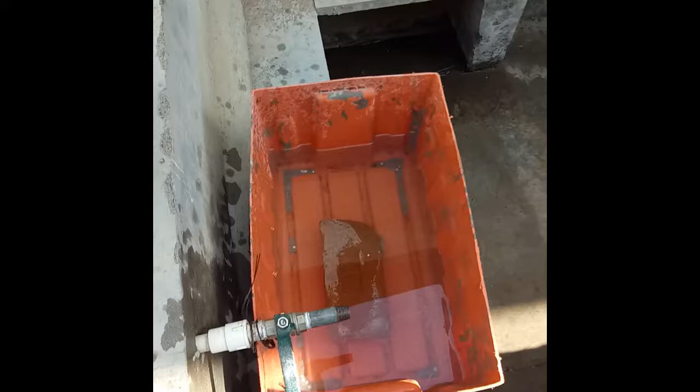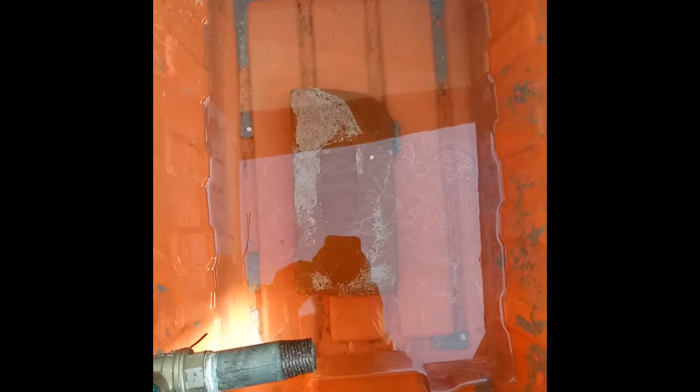So students, today we'll perform the compressive test on the brick. You should take three samples. One sample you can see here. The procedure is that first we need to put this brick under water for 24 hours, and then we have to remove it. So we'll remove it after 24 hours, allow it to surface dry, and then we have to perform the test.

Next, you have to fill this frog with mortar, and then perform the test. So you can see the sample, right? We'll take this brick out after 24 hours and then perform the test. So after 24 hours we have taken out the brick, and we'll perform the test on this brick now. But first we have to allow it to surface dry, and then we'll perform the test.

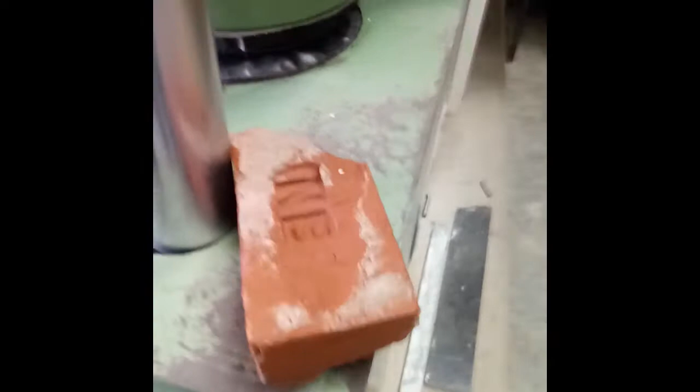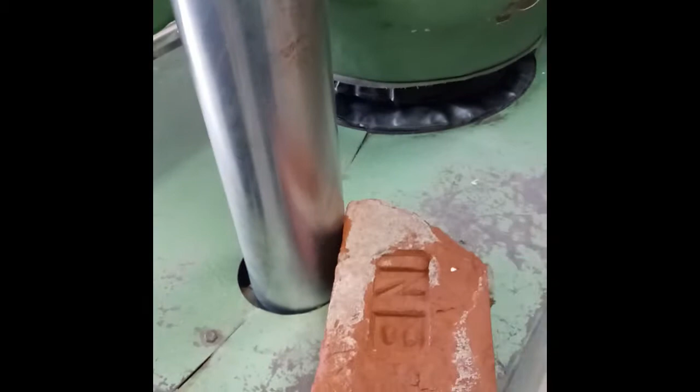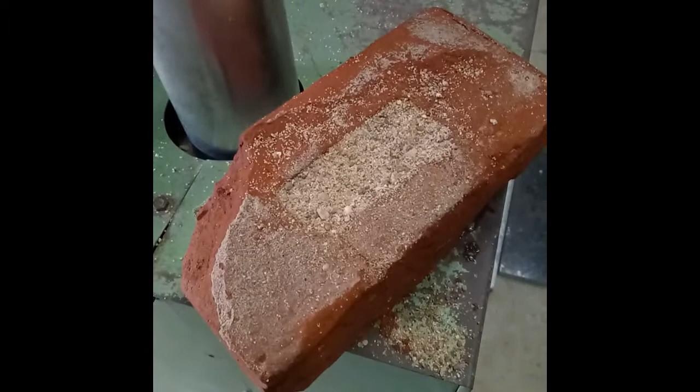We'll consider only this unbroken portion, and we have to measure the actual dimension and count the total area, and apply a rate of load of 14 Newton per mm square per minute. So this is the sample. We should fill this frog with mortar, but we have filled it with sand, so that's okay. We'll put load on the whole brick, but measure only this dimension. Since the other part is broken, we'll measure just the unbroken part, and the load should be equal to 14 Newton per mm square of this size, right?

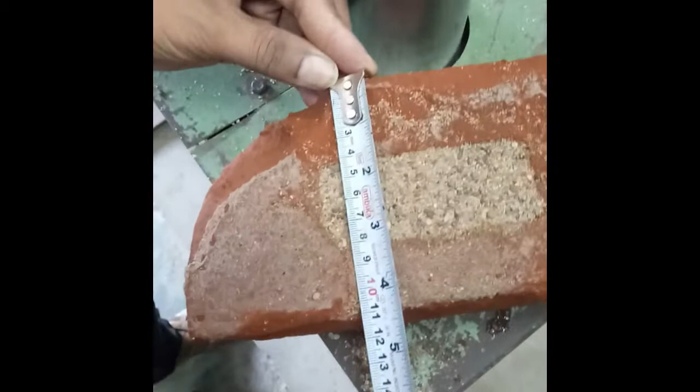So we'll measure the dimension. You can see that the dimension is 11 centimeter, or 110 mm. Now we'll measure like this, since we are considering this portion only. It is 9.5 centimeter, or 95 mm. So it is 95 by 110, and that area we'll consider for the test. The remaining portion we are not counting. We should have a whole brick, but since we got a damaged piece, we will perform the test on this one.

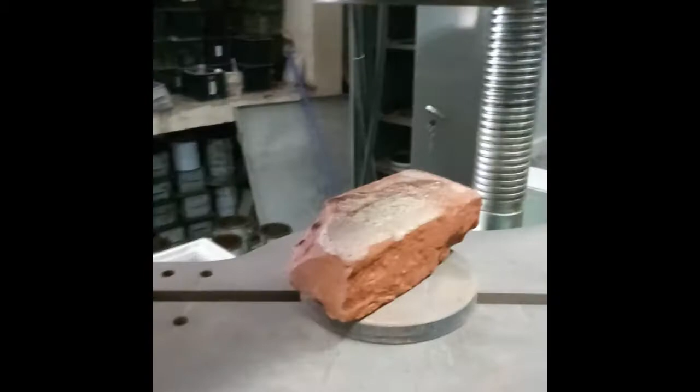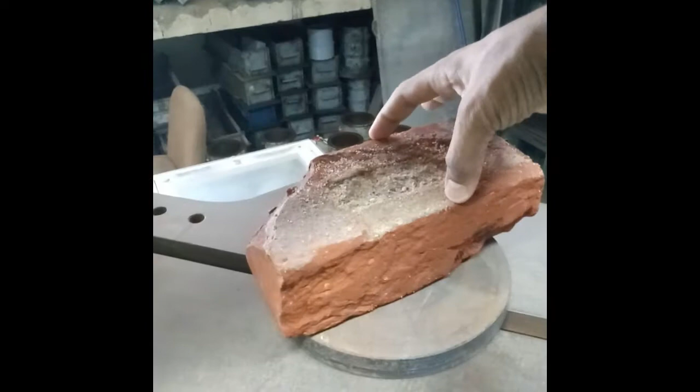We have put the sample inside the UTM. I don't need to tell you more about the UTM, you already know. This is the lower jaw where we apply the compressive force. The rate is 14 Newton per mm square per minute. We have this length of 95, and this is 110. So the total area will be 95 multiplied by 110, multiplied by 14 Newton. That much load we have to apply per minute.

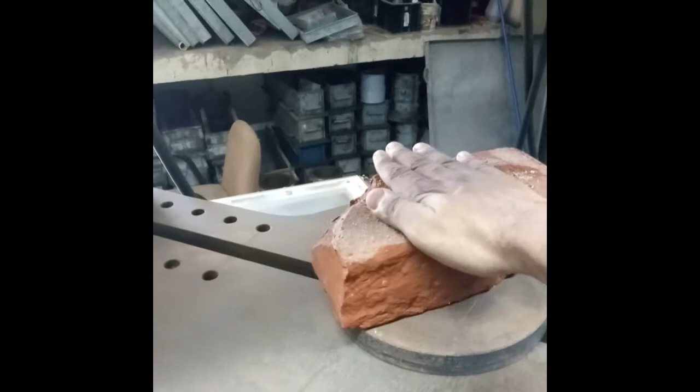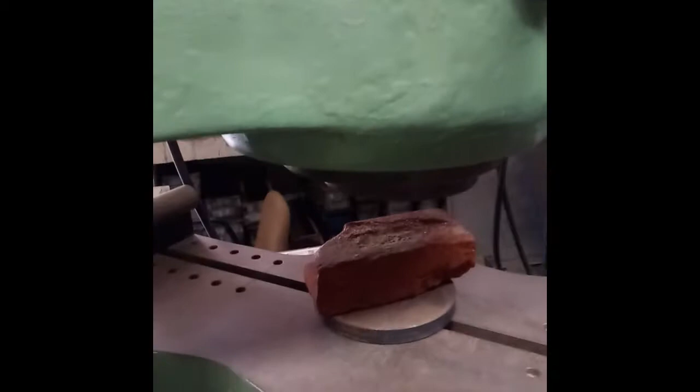So we'll just adjust. You already know how to do this adjustment. For the initial adjustment, we'll keep this lower jaw on this one, and then apply the hydraulic load. That's how we'll start the testing. This is the initial setting. You already know how we do this using those yellow buttons. Now you can see we have pressed this lower yellow button, and that's how this is coming down. It should just touch the brick.

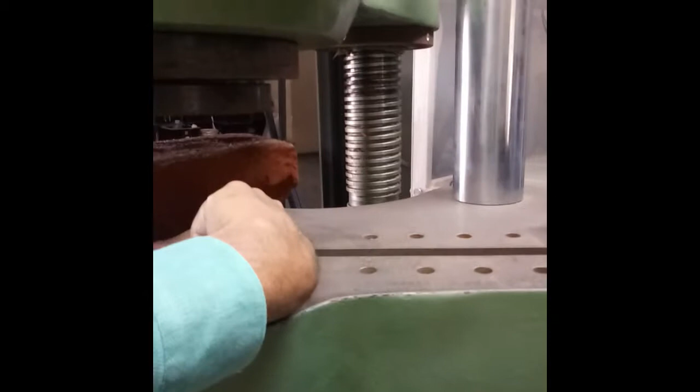The plate size should be more than the brick dimension, but since our main interest is this portion only, this plate is sufficient. Otherwise we should use a bigger plate. Right.

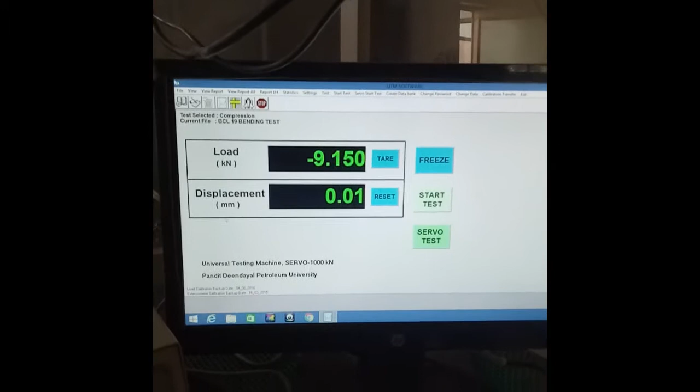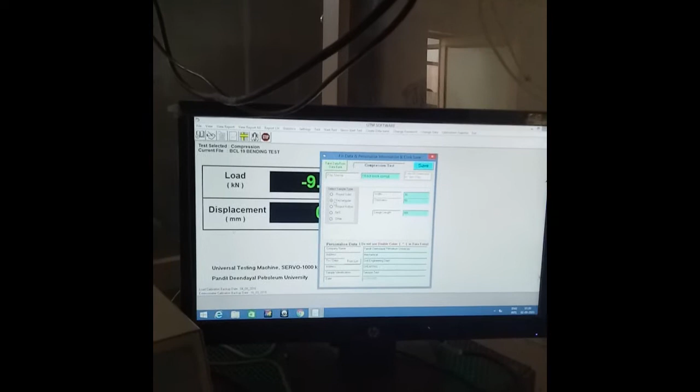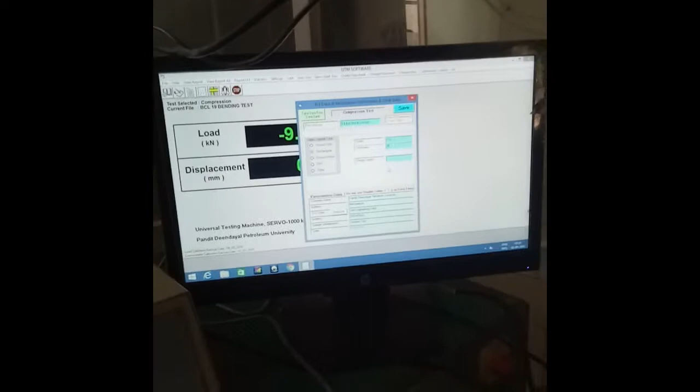Okay, so we started the software. It is showing some initial reading. We have to first create a new job. We'll give the name as 19 BCL brick. The dimension is rectangular. Width is 110 and thickness you should enter 95. So these are the dimensions. Gauge length, just a minute, we'll enter as the thickness of the brick, which is 75 mm. That's all.

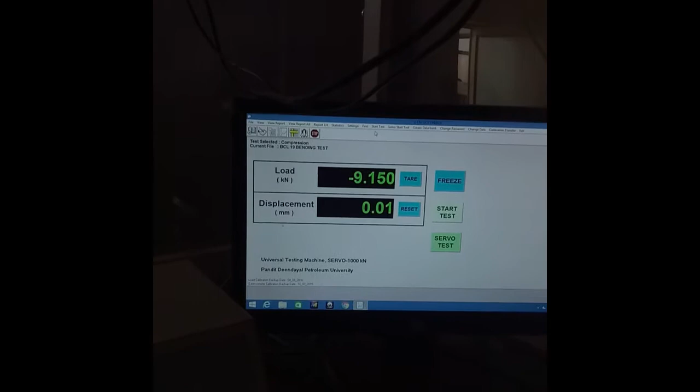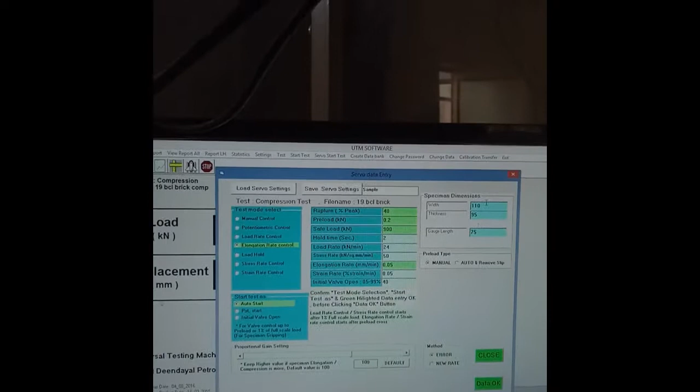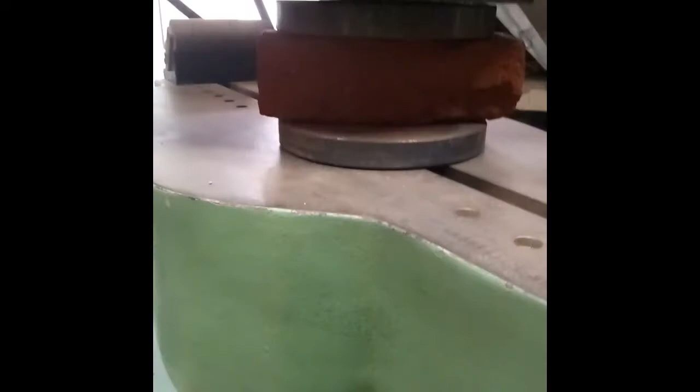Then we'll start the test. We'll set the rate of load, and here you can see that we have set it at 24 kilonewton per minute. At this load we will apply the total pressure on the brick. Okay. Now you can see we have placed the sample perfectly, there is no gap. This we are doing with the initial setting. Now we'll start the actual test.

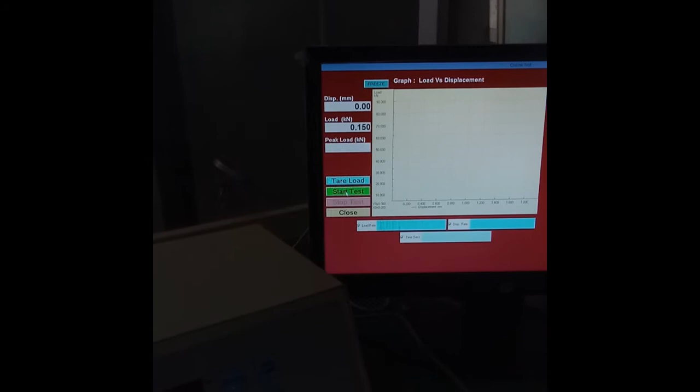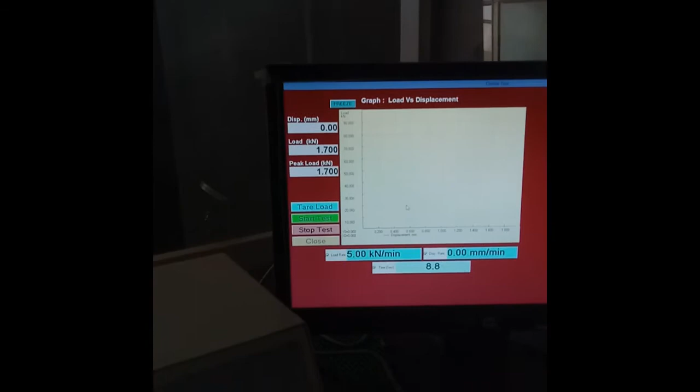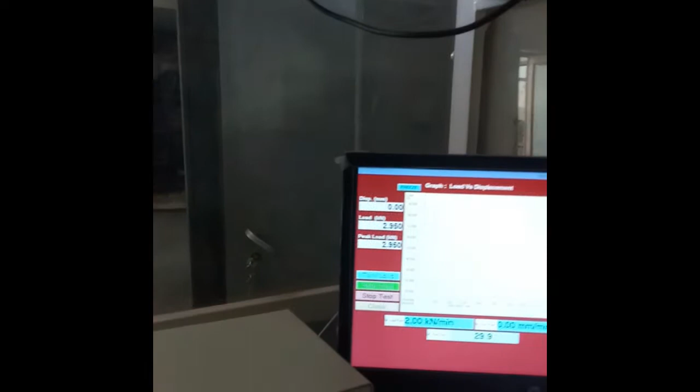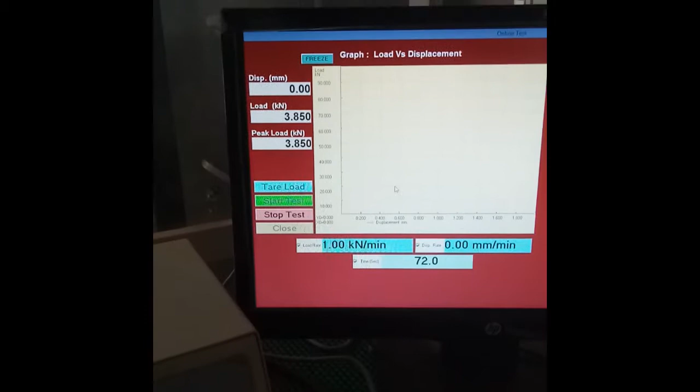Now if you come and see the brick, you won't be able to see any deformation, because those deformations are just in mm. So mostly we'll be interested in these readings only. Now the maximum load is 3.9 kilonewton.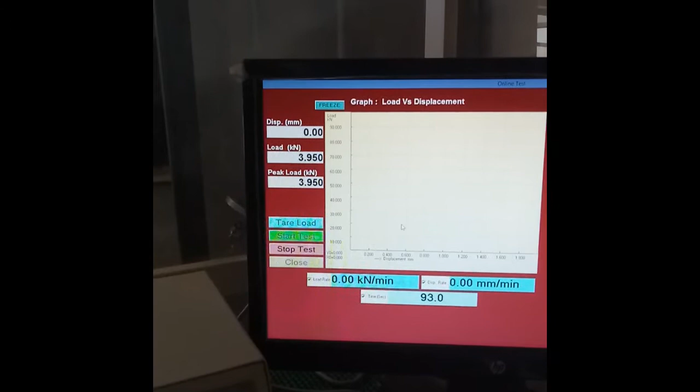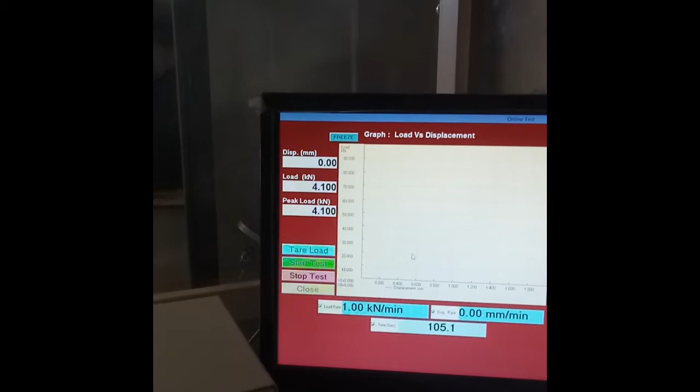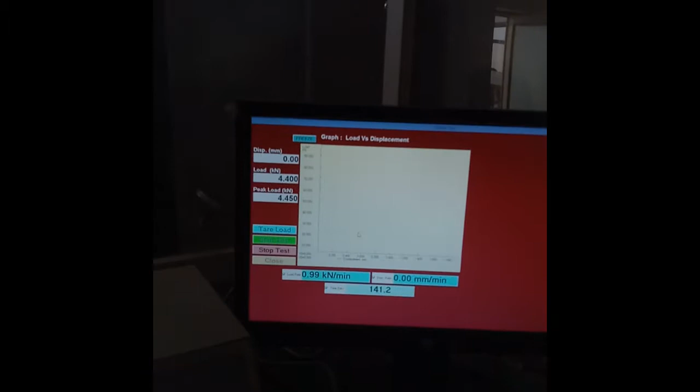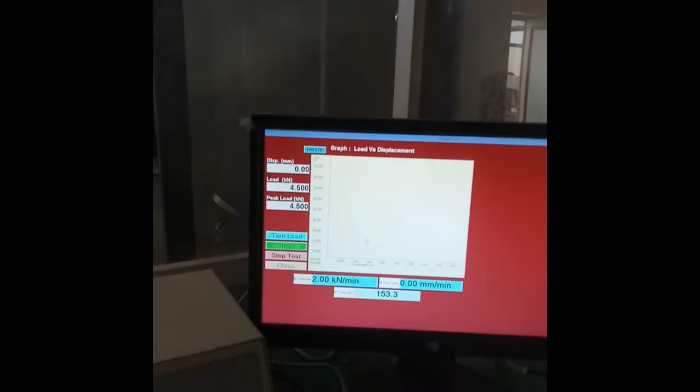Of brick you won't find any displacement here, right? Or even if it is, it will be a very small value, since bricks or clay materials are brittle in nature. So for very small deformation they fail, but before failure they can take a certain load and then they fail. That's how, even for say 4.4 or 4.5 kilonewton, the deformation is just 0.01 mm. Right?

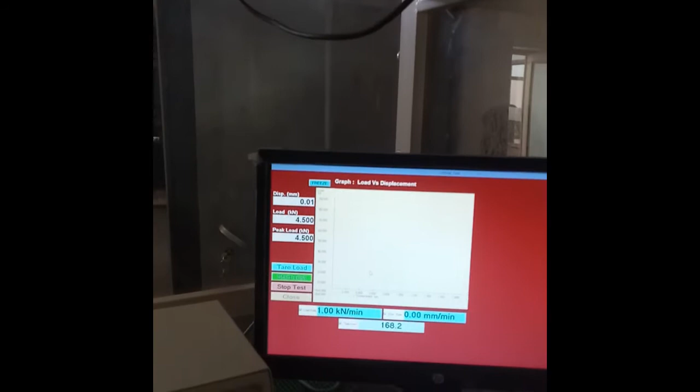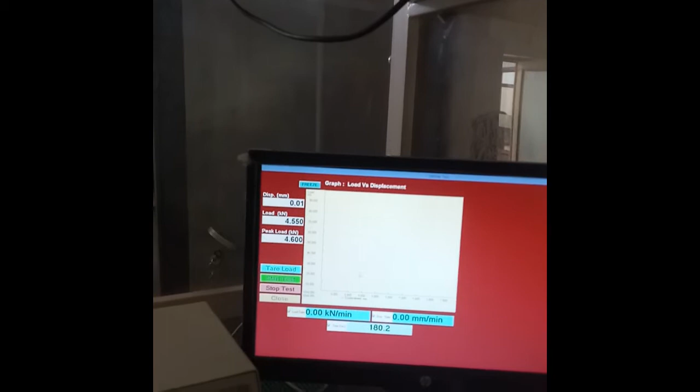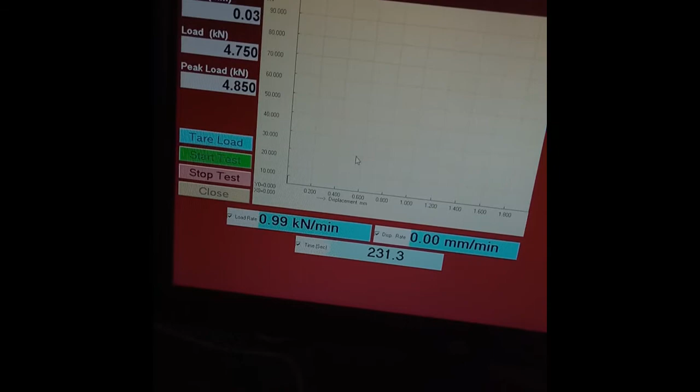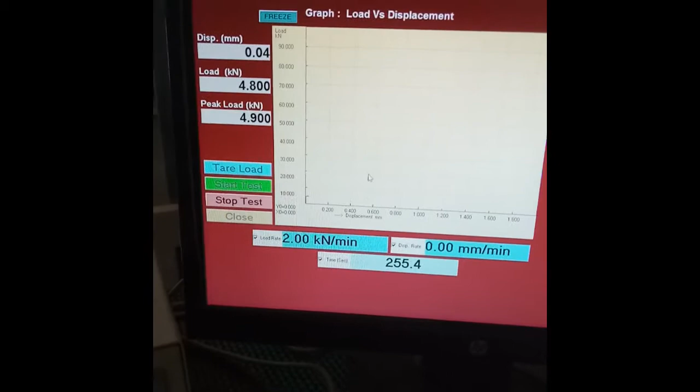So definitely in brittle material, this is the problem. They fail at very small deformation, but they may take some compressive force before they fail. The maximum load it took is 4.8 kilonewton after 231 seconds. See, after this much load, a very small curve here you can see. As I told you, these are brittle materials, they won't show more deformation, they'll just fail at very small deformation.

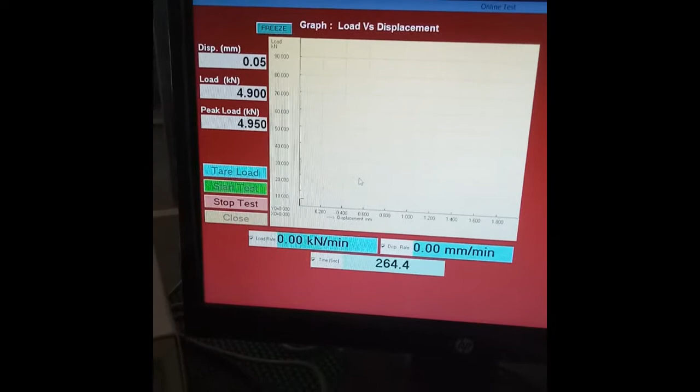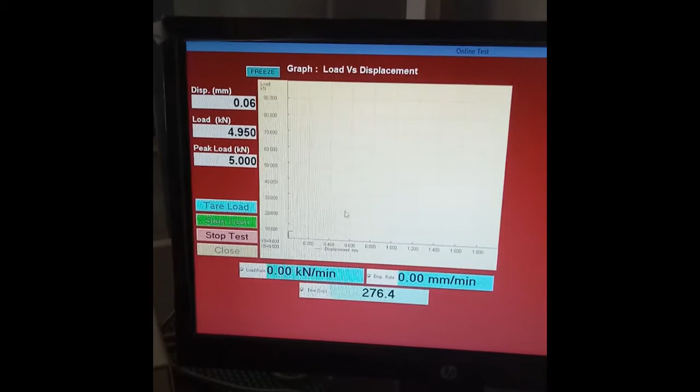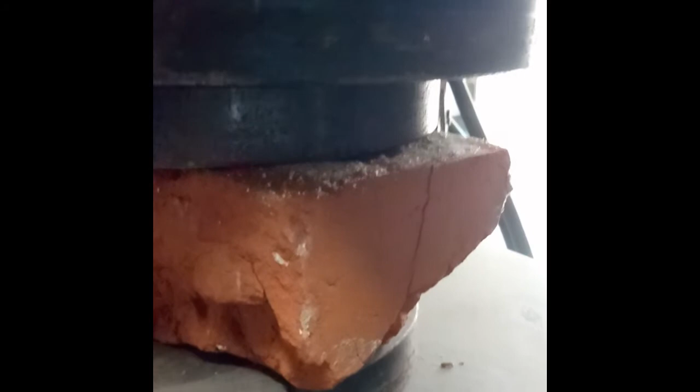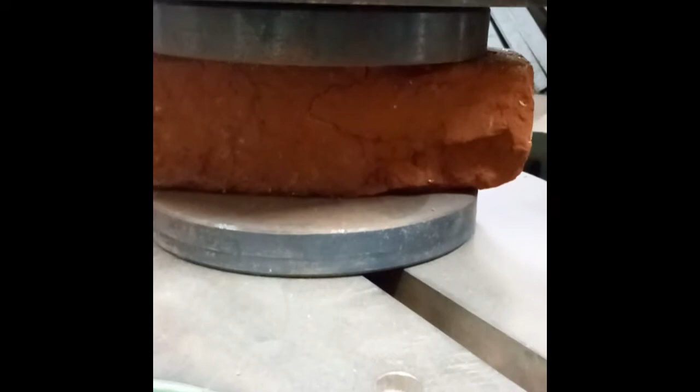So maximum load is now 5 kilonewton after 275 seconds. If you can see, even now a crack is coming on the other side as well. See, you can see this crack. So the sample is failing now. Definitely it will take some more load before it fails, but you can see this crack. This crack initially developed and it will propagate. On this side, a new crack has developed. You can see the thickness of the crack will increase with time.

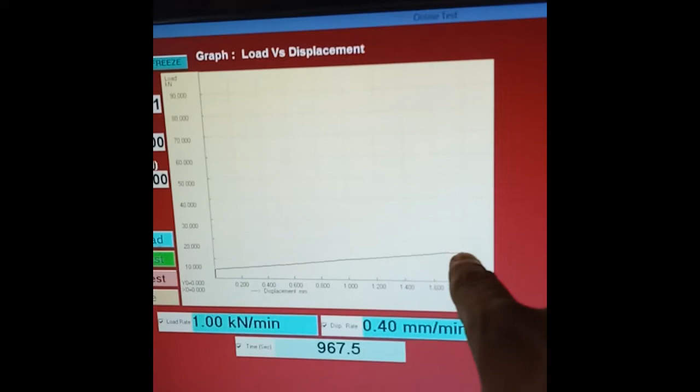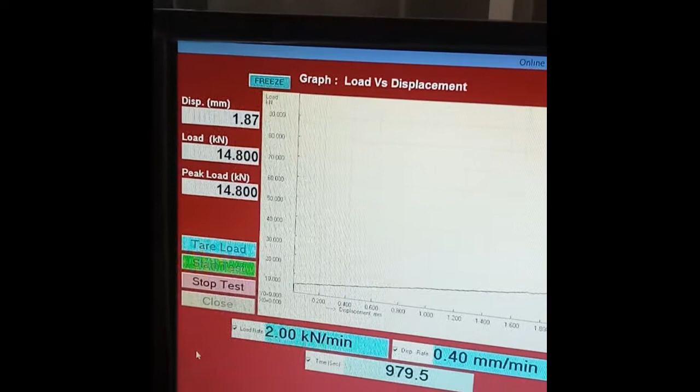And here you can see the load deflection curve. After that crack, there are some undulations, right? It was linearly increasing, now it becomes a little flat. These are indications it will fail at any time. Total load is say 14.7 kilonewton. Now you can see this crack width has increased, right? I cannot say exactly how many mm, but definitely the crack width is increasing now.

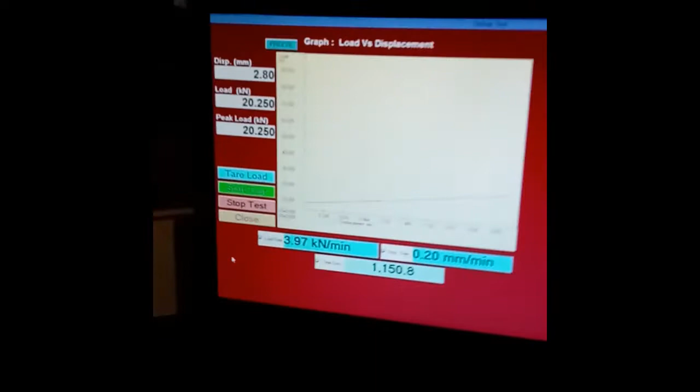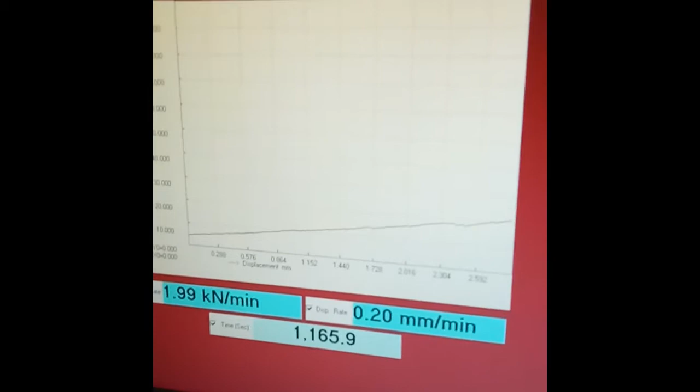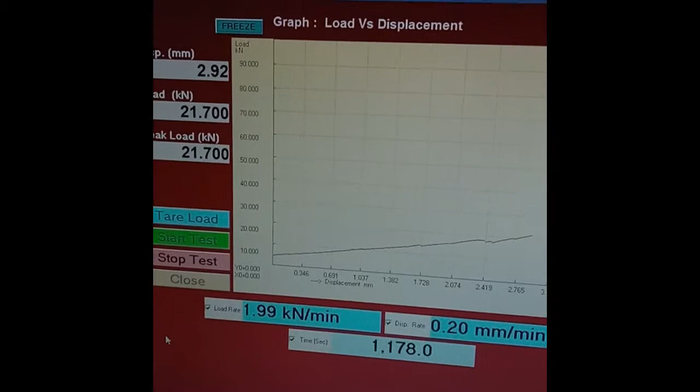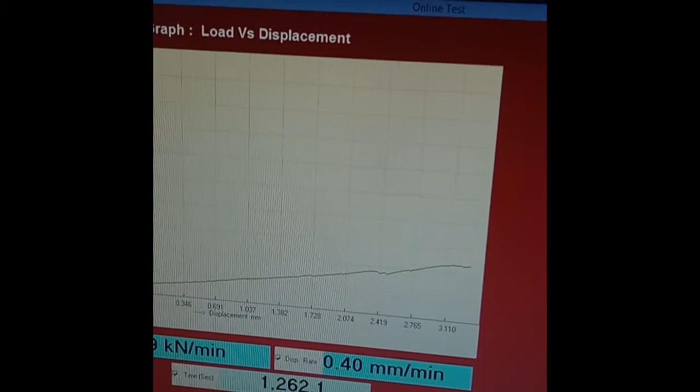So crack width is increasing, and corresponding to that is the load deflection curve. Once a crack develops, immediately the graph will come down, again it will take a certain load, again coming down, again going up. These undulations correspond to the cracks developing in the sample. Total load now is 21 kilonewton. Now you can see this curve is becoming flat. These are an indication of either a bigger crack or the material is about to fail.

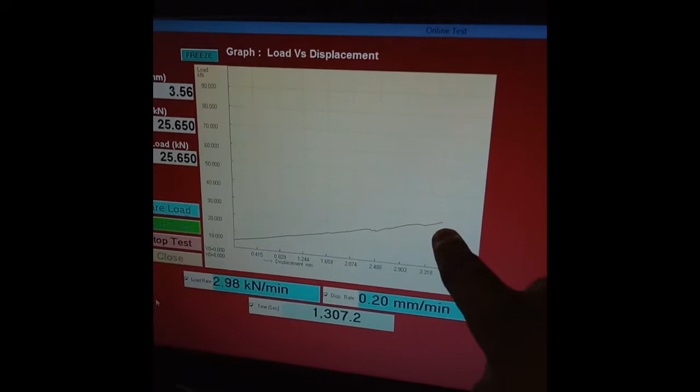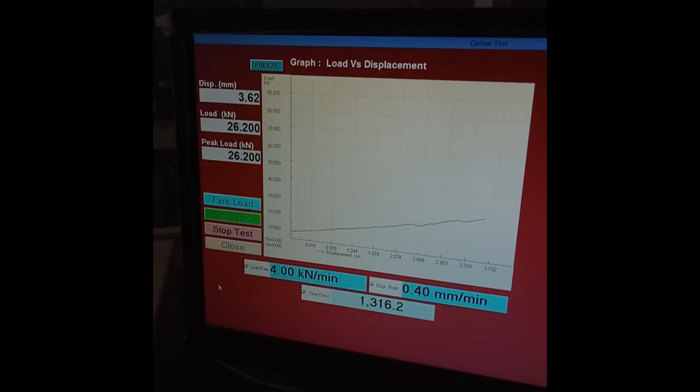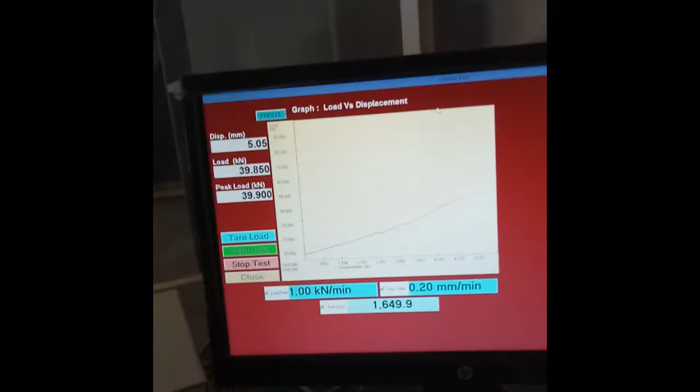So here also, this side it's okay, you cannot see any big symptoms. But on this side you can see the width is increasing. So it will fail at any moment now. Now this curve is going up, so it means it can take some more load. It still hasn't reached the ultimate value. I expect it should go to at least 40 kilonewton. Let's see what happens. The total load is around 40 kilonewton, and now again this curve is becoming flat. So I think it will fail at any moment now.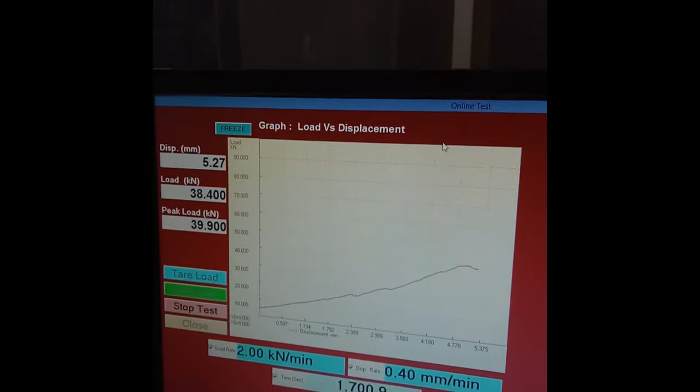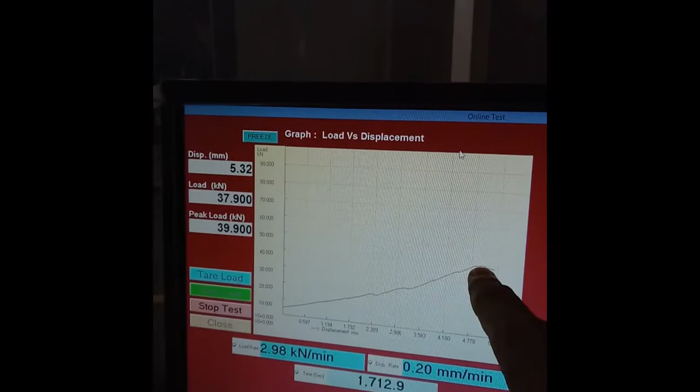Here also you can see more cracks are developing on this side. So it is about to fail now. This side the crack width has increased. Now here you can see the load curve is coming down, so it has reached its ultimate load. The maximum load is around 39.9 kilonewton. So it took a maximum load of 39.9 kilonewton. Now it won't go up, it will fail now. As such it has failed, so it reached the ultimate load. The curve is coming down, which means it has failed. We only need to see the failure load, otherwise the ultimate load is reached.

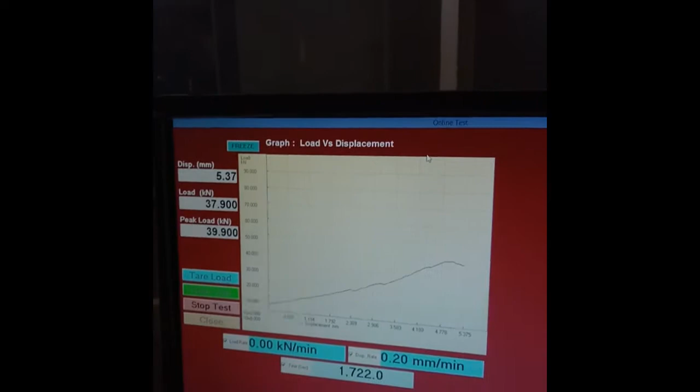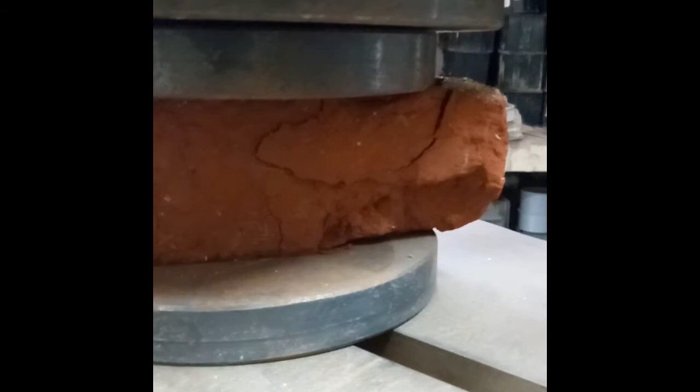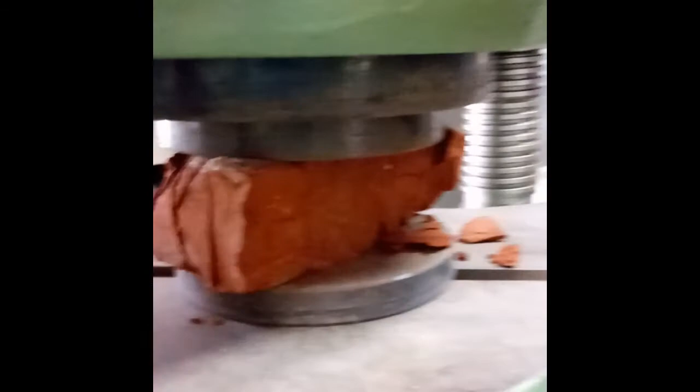And if you see the sample again, you won't find it totally crushed, but you can see the cracks that developed. Here you can see it has failed in this portion, and here you can see the major crack. This is the actual crack because of which the load taking capacity of the brick has failed. Now you can see how it is failing. Now cracks are developed everywhere, so this brick has totally failed.

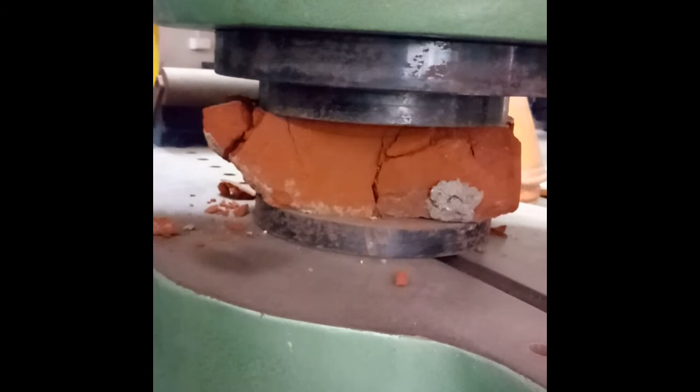On this side also you can see that cracks have developed. Now this brick has totally failed. So that's the failure of the brick. The maximum load it took is 39.9 kilonewton. From now on whatever failure occurs is of no use, but just to show you how it will fail. Now the machine has automatically stopped since the material has failed and there is large deformation. So this is the final curve.